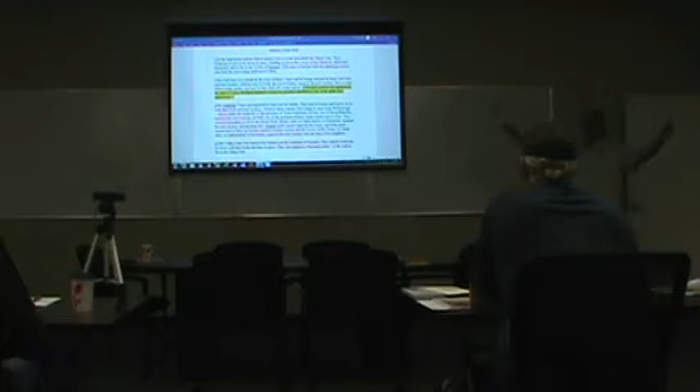So the sheep that were being sacrificed were brought in through the sheep's gate. Fish gate, what came in through the fish gate? Fish. There you go. So I've taken some liberty here because a lot of times these names from antiquity look pretty, we just modernized some of them. So we had Harry over here, Harry and his team. They did the fish gate and the section.

Zach did this, which I think is great. You know, people have always been complaining about managers. I highlighted this, I think it's great. The next section was prepared by the men of Tulsa, but their managers would not put their shoulders to work under their supervisors. I thought that was great. Even back in antiquity, people are bitching about the boss.

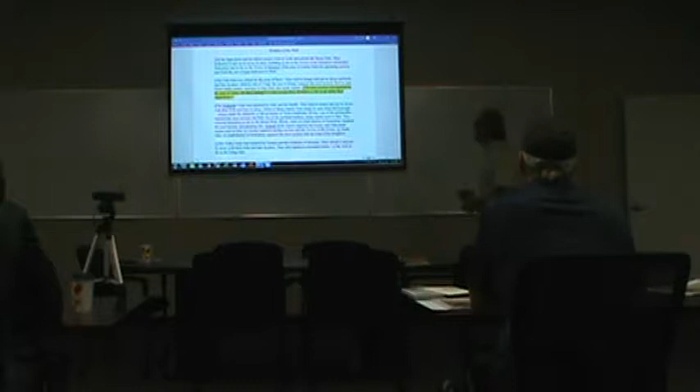So, they went over and they did the next section. Then this Jeshana gate was repaired by Jody, and then some repairs by McDonough, then they had goldsmiths. And so they took the walls around Jerusalem, and each group of people was assigned to a task. The Alma Gate was repaired by Dennis and so forth. The residents of Marietta, did you like that?

Yeah, okay, fine. All right, so what's the point? What did they do to repair the walls? First thing they did is that they had a task that they were trying to do. And what was that task? Build a wall. Right? They were building a wall. They then took a look at their available resources of people and product, and they broke it down into specific sections of work.

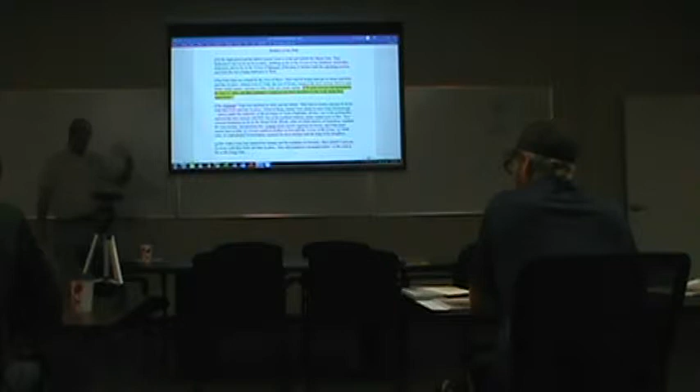Okay, and then what did they do? They went to work. What they did in antiquity, we do every day. The reason I bring this up is simply to say, anytime you go back through history with any ancient structure, you will find that the procedures and techniques they used to plan are exactly the same thing we do today. So when we begin a task, we say we've got to start it, we have a finish. But what comes before the start? Planning comes before that. What comes before planning? An idea.

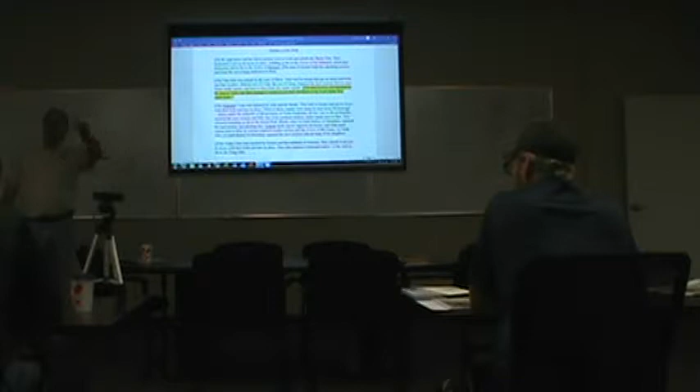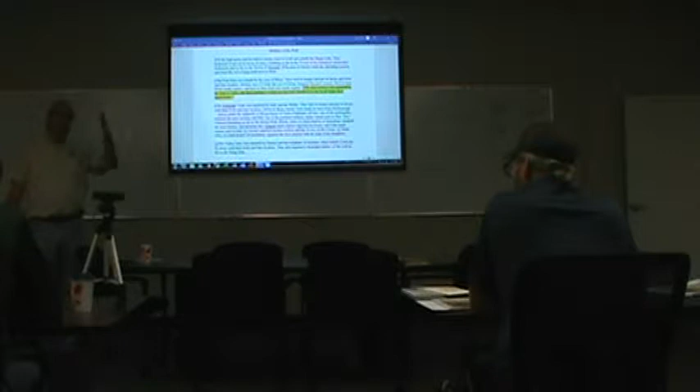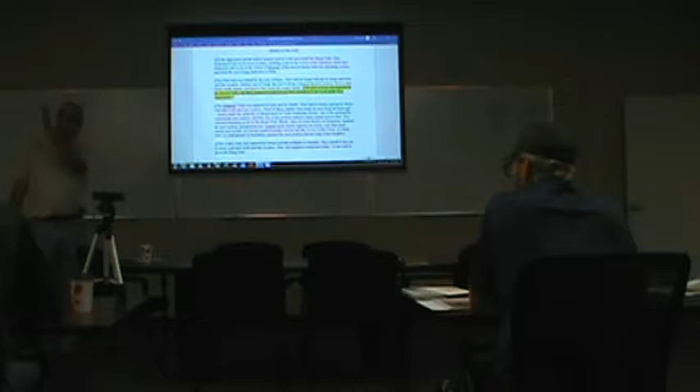The owner has an idea of what he wants in a building. He has the architect put that into plans and specifications, and from those plans and specifications we turn that into reality. So where are we in this line with our scheduling and planning? We are in between the concept, the idea, and the preparation of working drawings. And now we're between the working drawings and the actual physical commencement of work. That's where scheduling occurs, okay? Does that make sense? Okay, all right.

Everybody here has got a book on CPM scheduling, and in this particular book it's broken down into sections. Section 1 is the pre-project planning phase. Now on the back table are plans on Live Oak. If everybody will, one person per table, go get a roll of plans on the building and get them up on the table.

You got props. Here, I've got this, this stuff works better. Great, and I can help you with the computer along. All right, okay, everybody got the blocks? Okay, open up your blocks. Yeah, they just throw them all out. All good, nothing special. Do not throw them at each other.

Okay, find your A, B, C, D, E, F, G and put them in alphabetical order. I don't have a certain block. Here, right here, we got it. There's the name, there's the fee. Tell me when you got them in alphabetical order. I don't care if they're in a line or up and down, however y'all do it. A, B, C, D, E, F, G. Brian, you want to hop up with those two so you can work in a team? How do you want to do it, Brian? It's all good, yeah, if you want to run solo. All right, no, they're all in there. Okay, you got it? You have two rows of M, N, O, P or M, N, O on both sides. They're trick blocks.

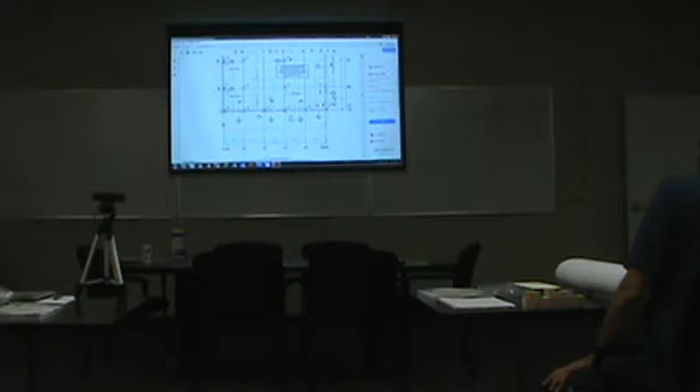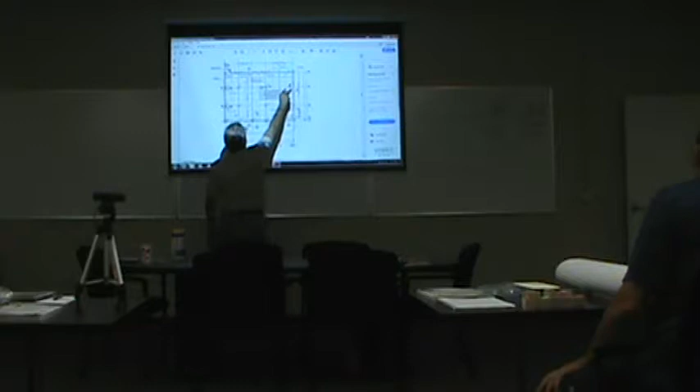Okay, so on our pre-planning slide, this is the goal: pour the footings for the shop. We have a series of shops, we've got continuous footings down the back of the shops, the right side of the shops. We've got a turn-down footing on the front, some isolated footings, and a footing running along column line 8 and 2.05. Everybody clear on that?

Okay, what are footings? Footings are the supports for the building. These are typical spread footings, they're not specially finished, they're not grade beams. So we're going to be bearing them on dirt. And so from a pre-project planning phase, what do we need to know about those footings?

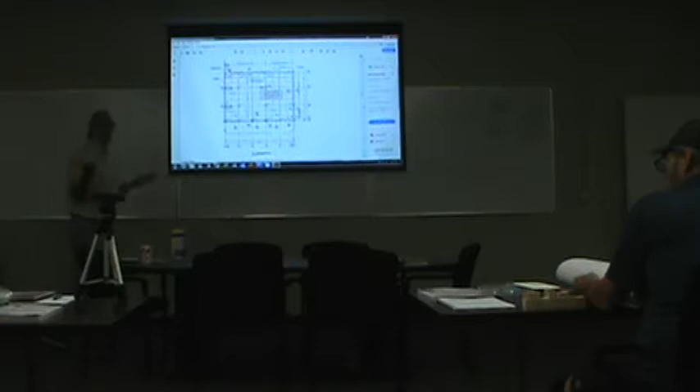Elevator. All right, first things, start here and we'll go around. Go. Okay, you need to know dimensions. Soil? Okay, soil bearing, that's good.

Rebar size? That's good, okay. Let's just say concrete rebar. Concrete strength? Okay, so we got that. How about elevation? Okay, you need to know the elevation.

Lisa? Lisa, you got anything? No, I don't. Okay, that's all right. Jonathan? We're gonna lay them out. Okay, you need - well, we said dimension, that's up top, okay?

David, any ideas? It's okay, we're not trying to put anybody on the spot, just trying to get some idea. Okay, we need to call that material handling. The amount of concrete - yeah, okay, so we need quantity. Okay, we need material handling.

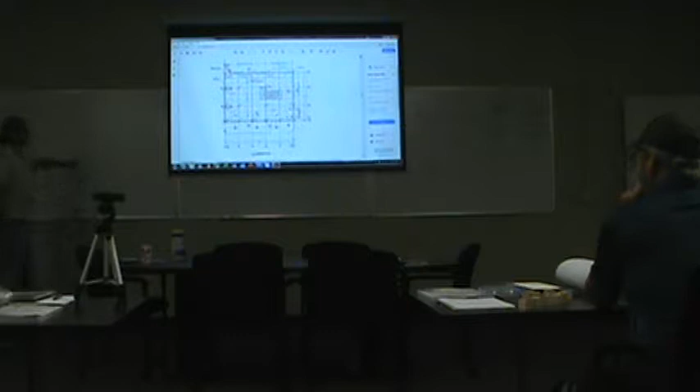Whether it's being poured or pumped - yep, that's under equipment, okay. Okay, how about material procurement?

You know what I mean by that? No. Where you get your concrete from? If you don't have the rebar, you don't know where the concrete's coming from, you don't have your rebar, you don't have your anchor bolts, how can you pour footing? Right? What else are you gonna procure besides the things going in the ground?

Might you need formwork? Okay, Live Oak, Florida, sandy soils, right? Probably not gonna be able to use the side of the dirt down there for a footing - maybe, maybe not, okay? Might need forms, okay. On the equipment side, okay?

Do you have a benchmark? Okay, do you know what you're laying out from? Are batter boards up? Okay, have they been checked?

Okay, so when we go through our activities, the first activity, which we will call A, take your A block and put it first. Okay, just move it up on top, there you go, there you go, now.

So we gotta get material on the job, material procurement, right? We know we gotta have material on the job, okay. Second thing you need to do is that you gotta have dimensions, which we'll call batter boards, BB, and layout. Okay? I know I got material coming, and then I gotta lay out the work, right?

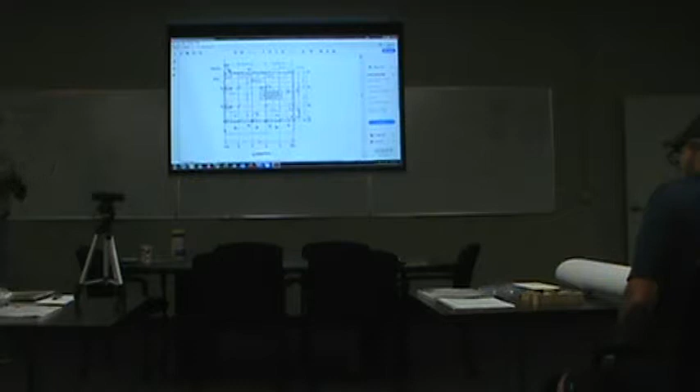What's next? Equipment. Quality control, we said procurement, here's A again. Okay, now, once we know where the building's going, we have a general idea about what the activity is going to be, right? So we've got to get equipment, A, B, C, D, and labor on the job, right?

Okay, and what have we done so far that has actually constructed that building up to this point? No physical work has been done, except batter boards and layout, okay? It's okay, you had to do all of that because if you do all of that correctly, it allows you, when the expensive stuff gets on the job, to

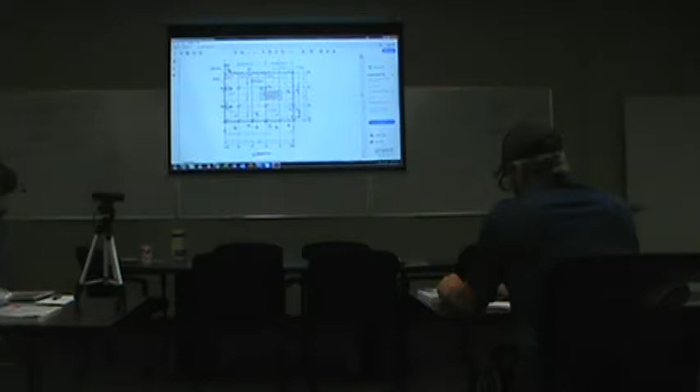If I dig 100 yards of footings, 100 cubic yards of footing dirt, okay, and I have a backhoe that's there for a week that cost me $500, how much per cubic yard did the excavation cost? 500 divided by 100, $5 a yard. If I leave that backhoe out there doing nothing all month, that 100 yards of concrete, or that 100 yards of footing excavation, cost me $2,000, so it would cost $20 a yard.

Okay, so if you think about it like this - anybody ever bought an engagement ring here? I know you haven't, but anybody ever gotten an engagement ring here? Okay, how do they sell diamonds? By the carat, right? Very, very small unit of measure.

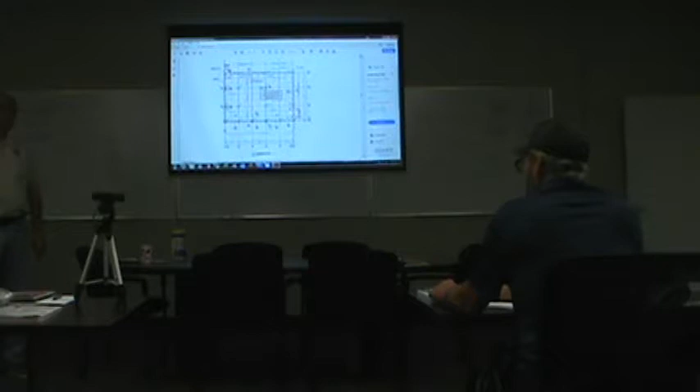Are diamonds cheap? No. No. Okay. How do they sell stone? By the ton. 2,000 pounds versus a fleck.

Okay. General rule of thumb is the more expensive something is, the more you need to pay attention to how much it costs. Okay. Now, you got to have quality control, be sure your footings are dug the right size, correct? Okay, so you then begin the physical activity.

Now, under the equipment side, okay, you also have to have ways to have your elevation right, correct? So you got to have a laser on the job or an optical level, whatever you happen to be using. At that point, you're gonna do what? You get the footing excavated, what happens?

Rebar, right? Okay, then what has to happen? Inspection, and then what? Concrete. Pour that damn thing before it rains, okay? Pour it before it rains.

All right, so what I want you to do, okay, is to take your blocks, okay, and on a piece of paper, I want you to arrange your blocks like this.

You have activities that can all start at the same time. Right? What we just went over, correct? And what would those be? You could start material procurement, right?

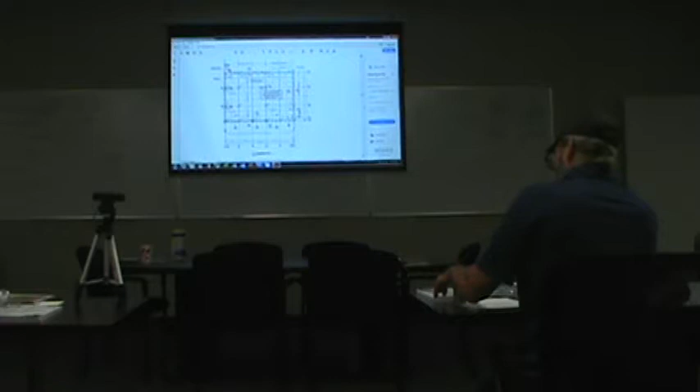Everybody got AB? You're feeding us, where's AB? Come on, man. AB, you got AB? All right, let's put them like this, AB in a line. Okay? Put them up and down. There you go.

Now, what we're doing is we're doing what's called a block diagram. See, wood blocks, I used to be called a blockhead when I was a kid. Okay, so we got our A block and our B block. And as we go from left to right, this is going to be time. Okay? Those two activities start first.

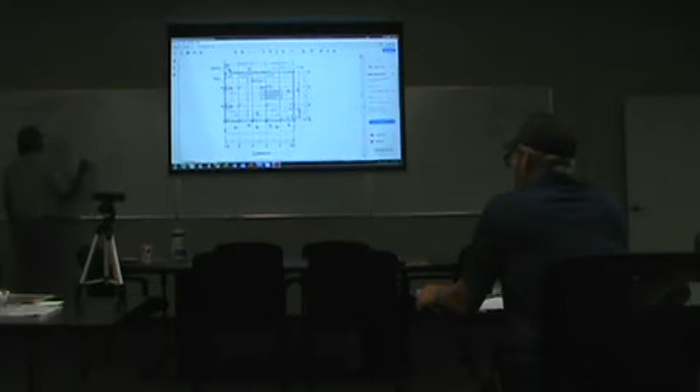Okay, now once we finish our batterboards and layout, what's the next thing we're going to do? We're going to come over here to equipment, okay, and labor. Okay, and what did we say we were going to call those? They were D, what happened to quality control? Quality control is here too, put C down here too.

Okay, and equipment and labor we call D, so put D. There you go, you got 3 in a row and a D. That's perfect, 3 in a row, perfect.

Then we're going to rebar, which we're going to make F. Okay, G is going to be inspection. Put a G, is inspection. And then if you see the E, F, G, H is going to be what? Pour.

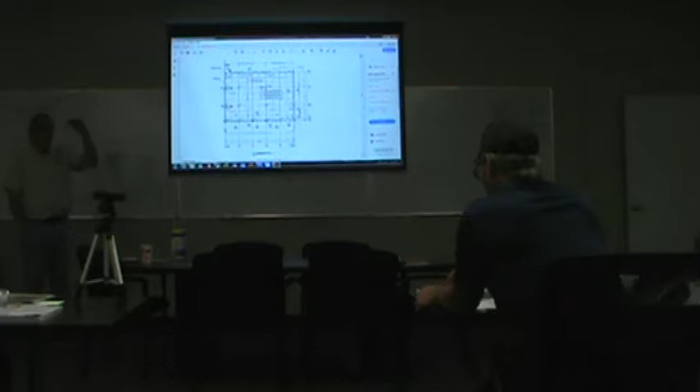Now, there are activities that each person in the team is required to do under each of these things. Okay? Now, who's going to do material procurement? What's a role, what person on the job has a role of material procurement?

Daytime super, right? Yeah, daytime super, could be project manager, helps to do the front end work. Okay, we go back a little further. Project manager's got to have an approved mix design, right? He's got to have approved rebar drawings, he's got to have approved anchor bolt drawings. Okay, so before you can, you've got to have some things feed into here from the PM side.

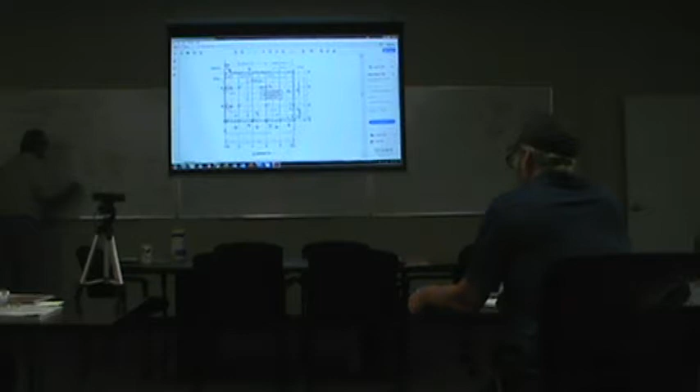But since we're dealing only with the field, we're assuming all that is done, and so we're gonna have a supervisor here, okay? The B, which is your dimension and so forth, is gonna be the supervisor plus concrete foreman. Right? Maybe a laborer will be involved, right? C, quality control, that's supervisor.

So as you look at each of these activities, we then come over to equipment labor. Who's getting the equipment labor? That's gonna be over here under your concrete foreman. Okay, assuming we're using a concrete sub, okay? Digging the footings, gonna be the concrete foreman plus labor. Same thing on rebar. Inspection is gonna be independent.

Okay, another thing we add here is quality control. Who's doing testing? Have they been lined up?

Okay, and then we have the actual physical pour. So let's put some time on this, and let's walk down the critical path.

Okay, does everybody know what a critical path is? Okay, all right, quick definition on critical path.

The critical path through a job is the longest path from start to finish. When I sum up my activities, the critical path is the longest line of time, once I add durations. Now, any activity delayed long enough will become the critical path.

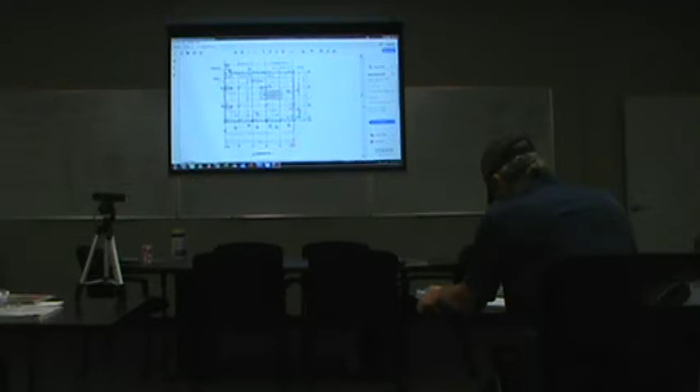So let's put 2 days here. Okay, so your activities A, B, and C have 2 days. Getting equipment on the job, being sure it works - how much time? Just say a day for this example.

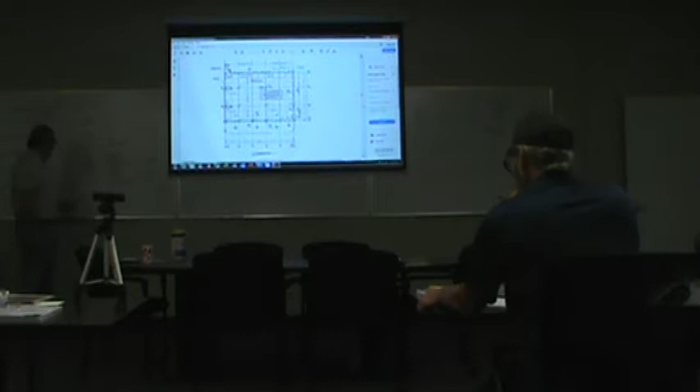Okay, so how much time are we at walking down the critical path? What are we up to? 3 days. Okay, all right, batterboards are up. You know, we had this back under quality assurance. Think we can do the batterboards in the first 3 days? Probably, okay, let's just say that for our simple example.

Let's not necessarily judge the accuracy of the schedule, but do the schedule. Okay, we're then going to dig the footings. So how long is it going to take to dig all these footings? Yeah, let's put 2 days down. So you got 2 days to dig.

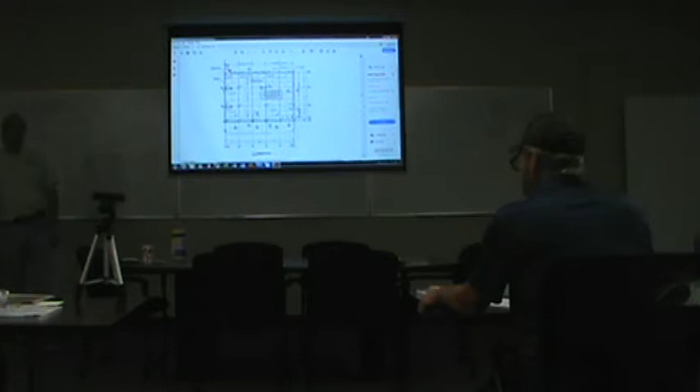Okay, you got anchor bolts and rebar, and you got to check those, and let's just say that takes 2 days. And you've already made friends with the inspector, and he won't delay you at all, he won't stonewall you. You call him and he comes out in the next 15 minutes because he likes you so much. So in 1 day you get your inspection, and the next day you pour, and then you strip and clean up.

It's a day, so let's count that up. We had 2 days that went to 3, which went to 5, which went to 7, which went to 8, 9, went to 10. Does that make sense to everybody? So if you look at your blocks across your paper, that's a 10-day duration.

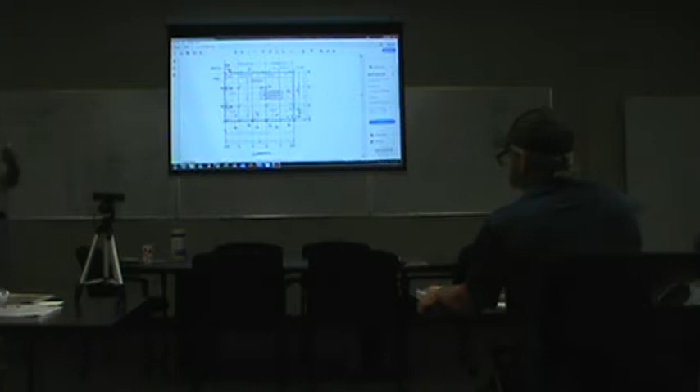Now, I'm not trying to give you guys productivity models here, but I'm trying to get you to think about how one activity affects the other. Okay, how does one activity affect the other? So...

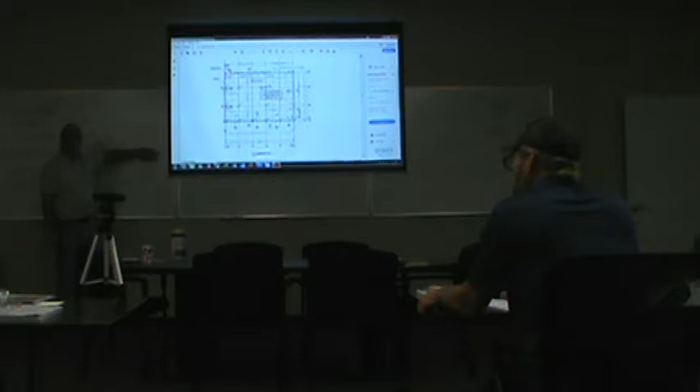Anchor bolts don't show up. Okay, so what can you not pour if you don't have anchor bolts? Can't pour that, can't pour that, can't pour that, can't pour that, can't pour this.

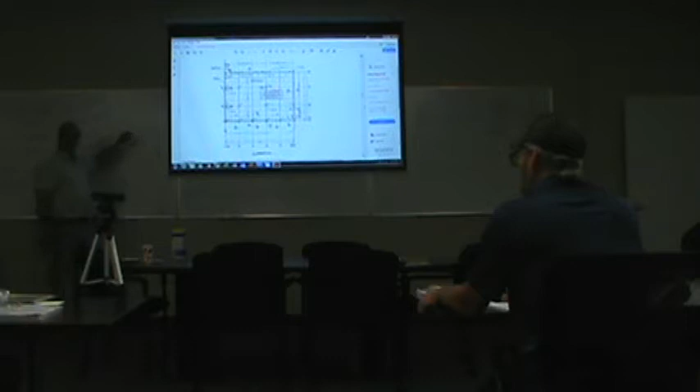Okay, now if I've got 20 days worth of footing work to do, I may be able to stagger the anchor bolts. You know, I may be able to do just continuous footings without the anchor bolts here. But for this simple example, we're assuming everything is there. But what I'm trying to get you to think of, if you don't have everything here, you can't do all the work. So you have to be thinking ahead to the 6 Ps on everything that you do.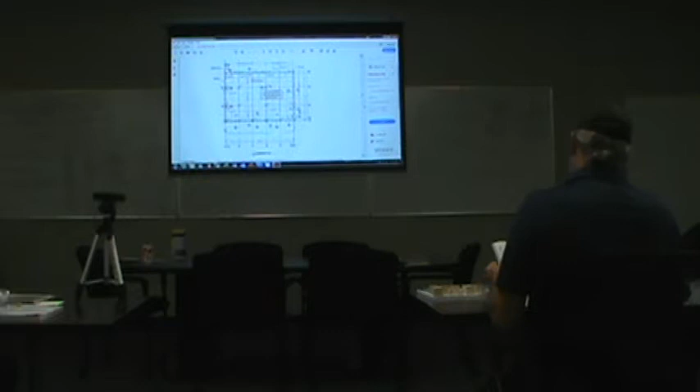Okay, so we kind of put some days down, but let's have a little bit more fun with this. So Darcy, if you would, let me see if I can see this. Go to sheet 4.2S2. You can move blocks.

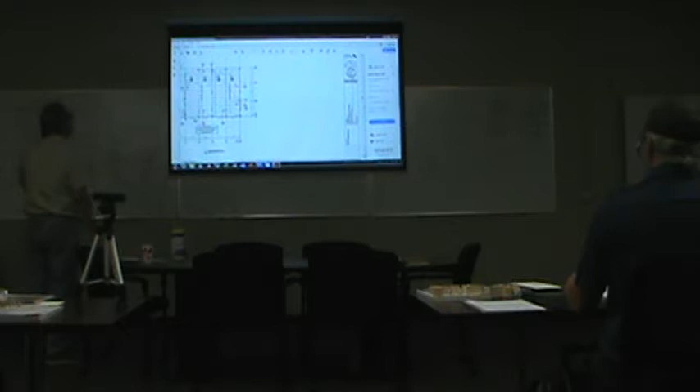Darcy, come back. Four. Sorry, only two. Two, whoa, stop. One more, 2.2, one more down. One more sheet down, I'm sorry. 2.1. Yeah, 2.2.

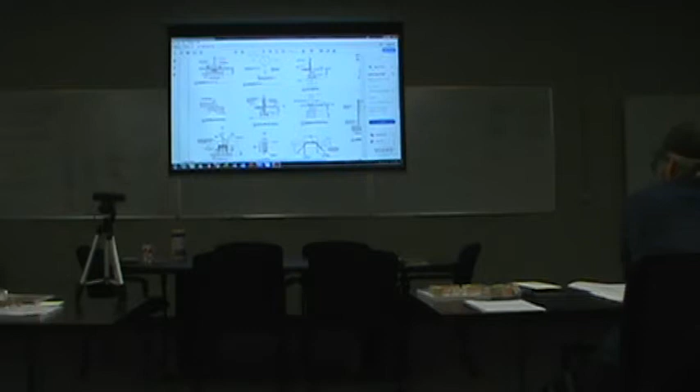Okay, that's on the sheet. Did I say 4.1? I'm sorry, did I say 4.1? Go to 4.1. Yeah, you're on the right page.

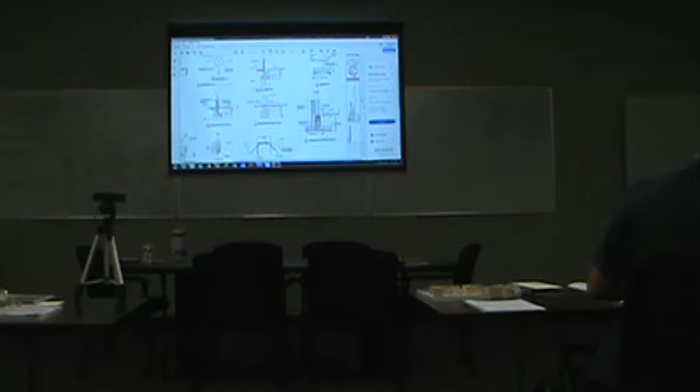Good, okay, let's look, just for the sake of conversation, at detail 2. Excuse me, detail 6, detail 6. Yeah, good, thank you.

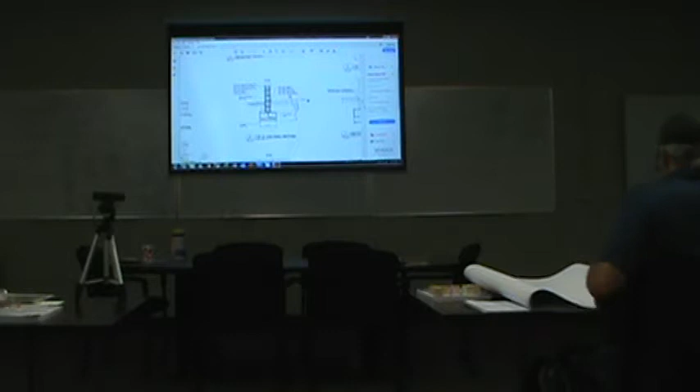Okay, now we know from looking at our foundation plan that we have a length and dimension on our footings, right? Okay, so we know this building is 100 feet wide by 70 foot deep, right? Everybody good on that? Okay.

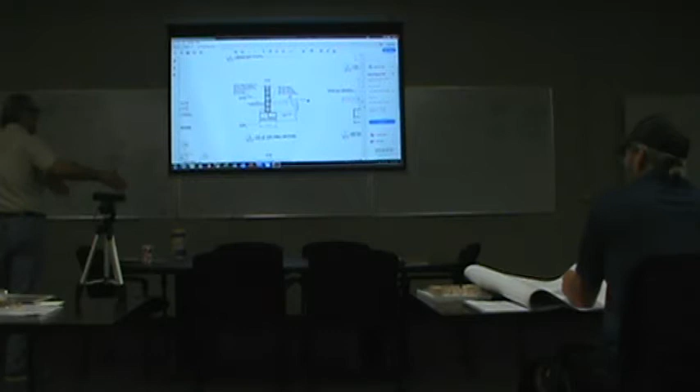So using our lessons in geometry, if we've got 2 footings 100 foot long and 2 footings 70 feet long, that's how many feet of footings? 340, rough numbers, okay?

Now, we would do an accurate takeoff on that. We know that footing by dimension is 2 by 1, so that's 2 cubic feet per running foot, right? So if we're 340 feet long and we're using 2 cubic feet per foot, how many cubic feet of concrete do we need? 2 times 340?

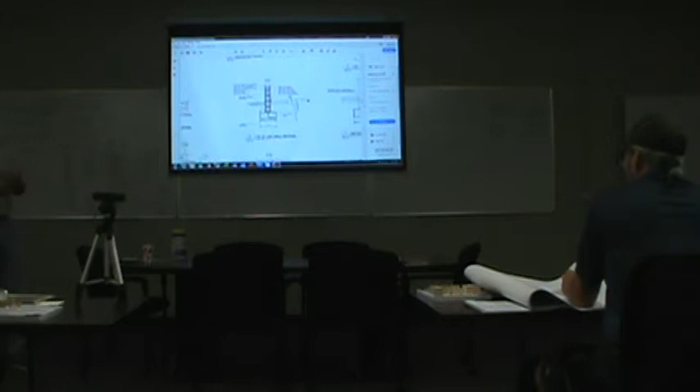680, right? Somebody divide 680 by 27. How many cubic feet are in a yard? 27, 3 foot by 3 foot by 3 foot. A yard is 3 foot long. Yeah, there you go, you've been practicing. What is it? Someone got a calculator here.

25 what? 0.18, 25.18. I don't think they'll let us order a .18 yard. So we're probably looking at 26 to 30 yards of concrete, somewhere in that neighborhood. We're slinging numbers right now, guys, please don't sling them like that when you're buying the stuff. Don't let me make a $120 mistake by going too fast.

Okay, so you got 25 yards of concrete. Now, the old rule of thumb is that you ought to be able to place 9 yards of footing concrete an hour. That's an old standard productivity rate, right? So if I've got 25 yards and I'm getting 9 yards an hour, may go faster, may go slower, we'll just use it to do productivity rates. How many hours is it going to take me to pour those footings? Three. Yeah, three. So you can then break each one of these items down into individual productivity rates.

Okay, tying rebar, you get an idea. How much rebar can you tie in an hour? Now, as supervisors and as people watching others work, your job is to start watching and equating what you're actually seeing done to the person.

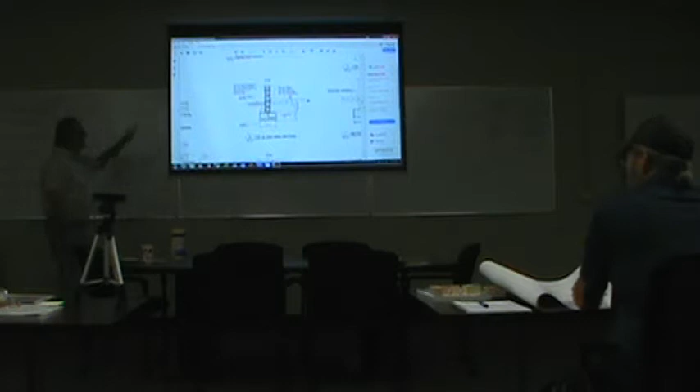How many pieces of sheetrock should 2 hangers hang in a day? There are productivity rates on that. Work up high takes longer than work right off the ground. All of that goes back to productivity rates, and your schedules are going to help you do that. Now, using your blocks, what other activities could be going on this job while we're doing footing excavation?

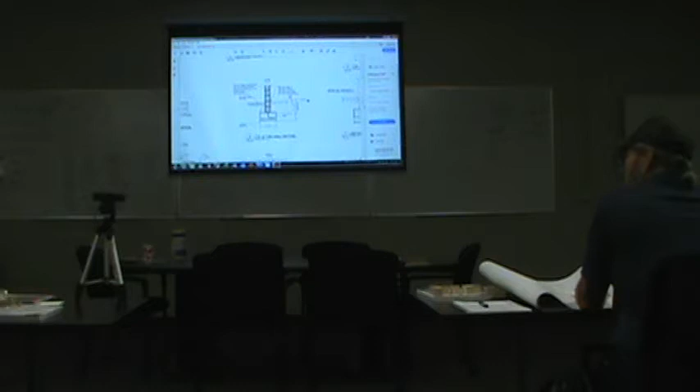Be doing site work, right? We could be putting in storm drainage, running sanitary lines, running water lines, curb and gutter, depending on where we are.

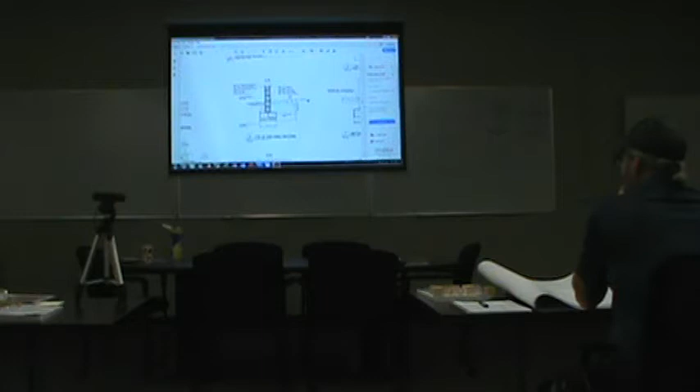We're getting ready to start laying masonry walls. Can you run it simultaneously? Can you not run block masons and steel erectors simultaneously? It depends on the design of the building.

If you have a roof structure that is self-supporting and you have block infill - your 4810 Publix and some of the others are freestanding steel structures - yeah, you can do that. But for this example, this particular building, let's go to sheet...

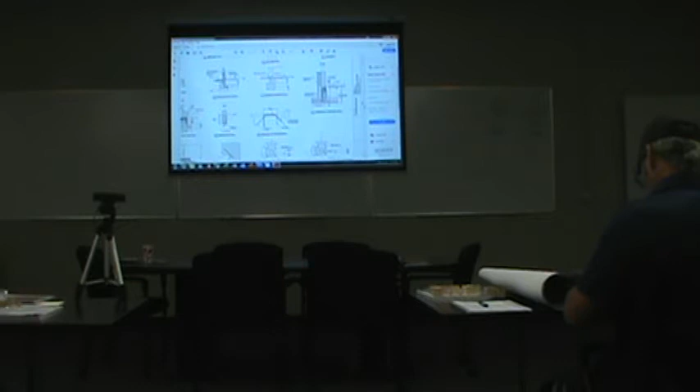Let's go to sheet 2, 2S3.1. There you go, Marcy, right on.

What do we see? Yep, roof framing plan. Now let's start with our roof framing plan, because what we're trying to do is support the roof, try to get a roof on the building, take weather out of the equation. Once you get a roof on the building, you work inside when it's raining - that's kind of a typical goal.

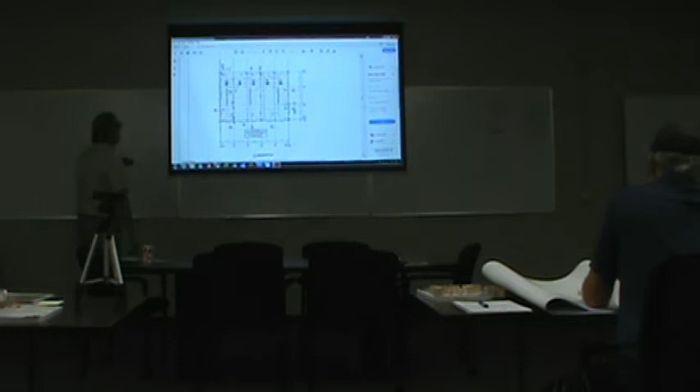Okay, when we take a look at column line 8, 2.05, look at section 10, 2S4.4. Let's go to sheet S4.4. Okay, section 10. Yep, got 10, good.

You got section 4.4, section 10. Okay, you got 10. 10 over here. Okay, we got 10, great, good job.

So what is supporting that column line? Just stay on that framing line. All right, we'll walk over to the other.

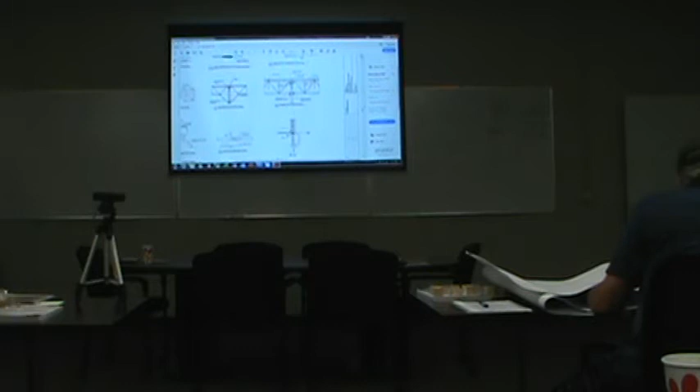Okay, do we need that block wall up to put up the steel? No. Why? Because you've got a row of columns along that line, and then you have a steel angle. That concrete block wall you see there is actually the wall of the Publix on this job.

So we do not need a block wall there. Okay, let's flip back to our roof framing plan again, and let's look at section 8, 4.4, 2S4.4, and 1. Go to those two and see what they look like.

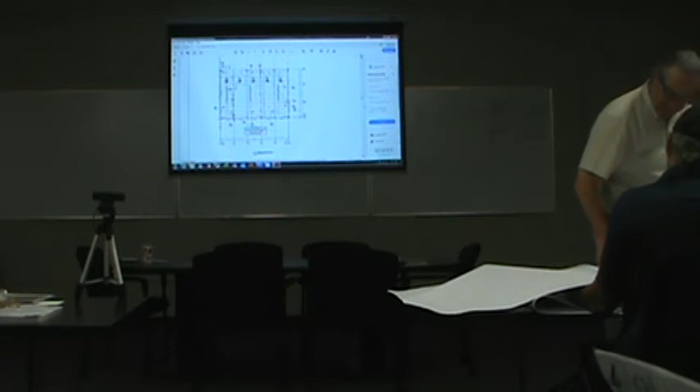So we need to have that block wall up to support that deck, don't we? Yeah, you need that for section 8, 4.4, 1, 4.4. Once again, it's showing how to put the truss girder in.

And that's a truss girder, it's on joist pockets, truss girder. Let's go. See that truss girder? That 28G - there's a truss girder here, a truss girder here - so they're showing a different seat configuration, right? You see that?

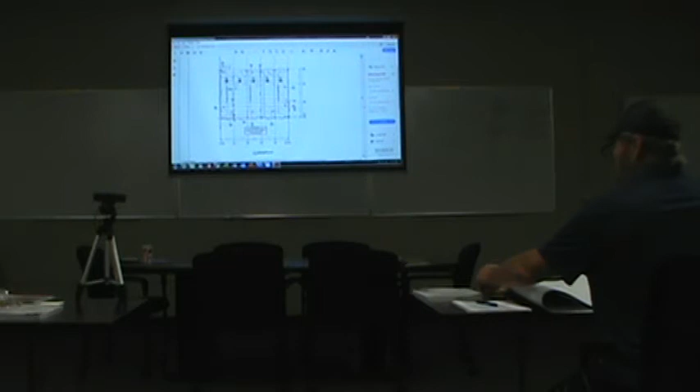Okay, so 4.3 is right here. This is a truss girder coming in. You can see they've got a different seat detail on this as opposed to - well, there's some notes on 4.3, and some of it's on 4.3 and some on 4.4.

Okay, so this is the platforms and that's on the wall. You see that? This is the block wall of the shop. This is the roof deck. This is showing here, the truss girder.

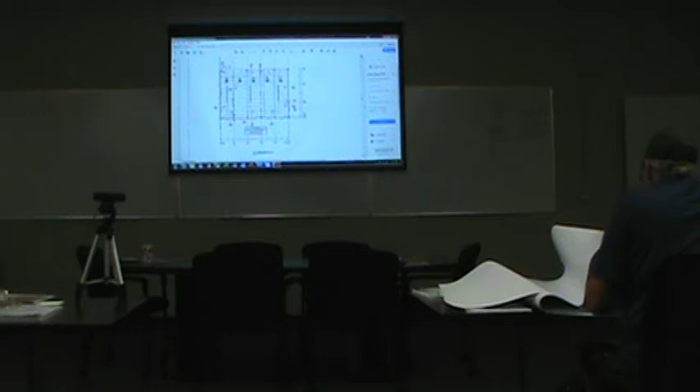That's a designation for a truss girder. That's the truss girder designation. This is your joist designation.

So you see how your truss girder is sitting in on the wall? Here, on the previous page.

So you need to do the deck bearing - the wall's got to go up to bear the deck. Going back one - with the truss girder, you've got a deeper seat where your truss girder comes in.

See right here? This is a truss girder. Does that make sense? So you've got metal deck running perpendicular to the joist, it rests on the wall, the truss girder also rests on the wall. Okay?

No, you have to get the wall up first, and then you're actually going to have a drop in the back wall for that to sit on. Yeah, you see the truss girder do that.

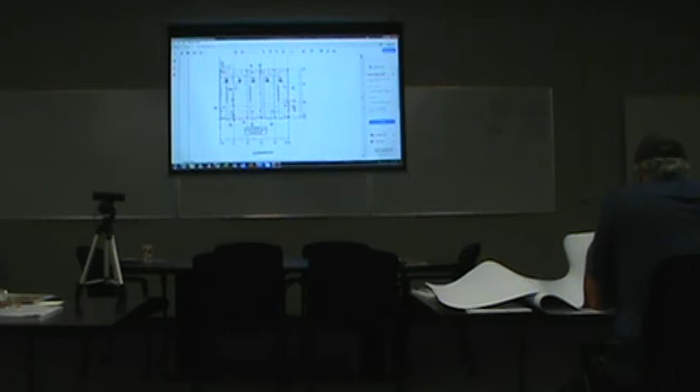So we're all good on seeing that at the rear of the building here, we've got to have that masonry wall up to support the metal deck, but we also have to have that wall up to support the truss girder.

Now, I don't know where everybody's at, I don't want to be too basic, but your designation here on the bar joist, it says 24, KCS3, a 24 KCS3. Does everybody see that? Yes. Okay.

Now we run perpendicular. What do you see here? Let's read that. 24G, 4N, 7.0. Okay, now that is what's called a truss girder. Your truss girders are GN series and things of that nature.

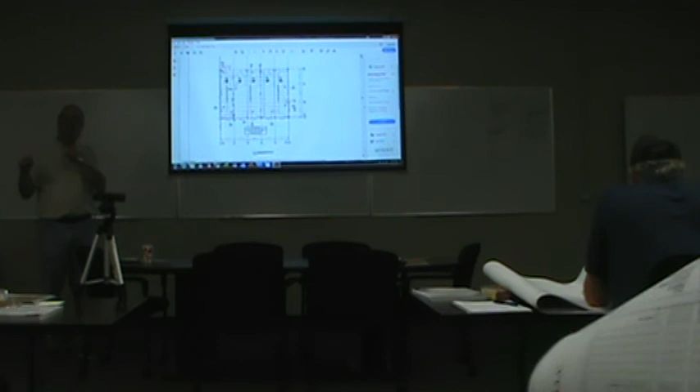You'll have a kip load on it, like 6.2, 1.3, things of that nature. So the way that they framed this thing is that they ran truss girders front to back along these lines, and they ran bar joists this way.

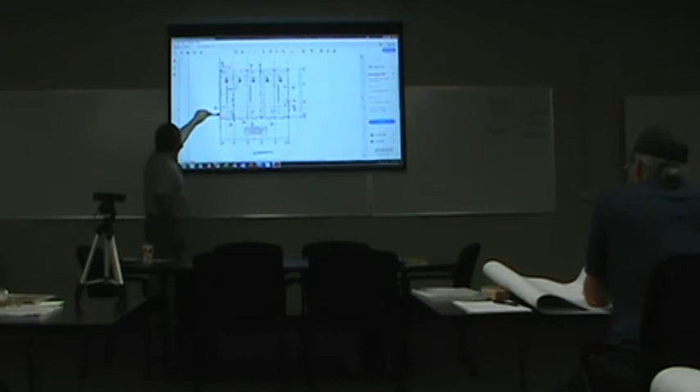What's this denotation? W16 by 26. Everybody understand what that means? Okay, you got an I-beam. The W means that it's a wide flange section. The top and bottom of a beam are called the flanges. This is called the web.

So a W16 by 26. The approximate, and I do say approximate, height of a W16 by 26 beam is 16 inches. It's actually usually a little bit different than that, would have to look at my steel book. It might be 15 3/4 inches, might be 15 7/8, might be 15 1/2, it may be actually 16 inches. But the first piece of this is the depth of the beam. What is that?

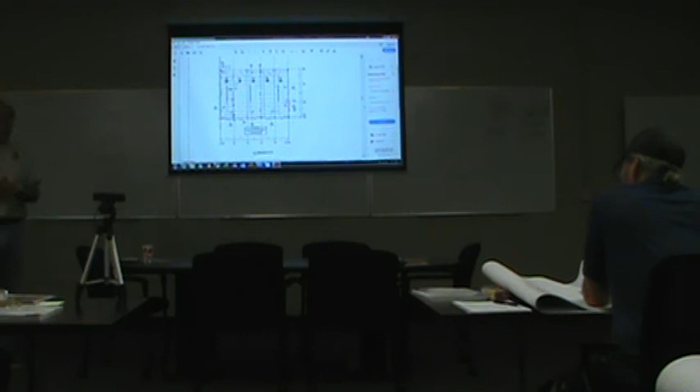Weight, pounds per foot. So if you've got a 70-foot distance times 26, how many pounds of beams do you have? Figure it, you got 70 feet of beams, they weigh 26 pounds a running foot. Somebody get a calculator, tell me. 1,820, almost 2 tons of beam, almost a ton of beams there.

Okay, see how that hooks back into your equipment? What do you have to lift? So we know from looking at the plans here, we won't go through the front details, but we've got an idea how the steel frame is going to fit on top of the masonry, right? We see that the perimeter walls on this building, at least the rear wall and the right side wall, are load bearing.

Okay, now what do we have to lay those walls? Got to have the block, you got to have mortar, you got to have sand, you got to have wall reinforcement, you got to have concrete reinforced rebar, right? Yeah, scaffolding. Anybody going in and out of the back of those shops? Door frame. Okay, can't lay without a door frame. So on the procurement side, we got doors, door frames.

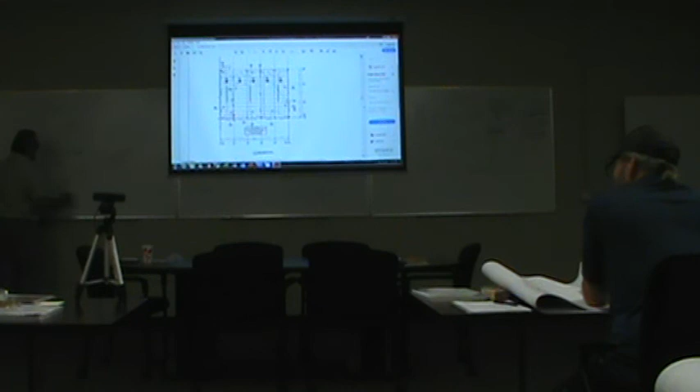Okay, we got block, Dur-O-Wal, sand and mortar. You might even need water, right?

Okay, block, water, okay, you're gonna have embeds, right? When you look at those details there, that truss girder, when you look on that sheet 4.3, what does that truss girder tie to? Ken, look at it clean. That's an embed, see that thing right there? See that? What does that say? Read that to yourself.

What builds into the wall? You see that? Let's get that for you. See that truss girder? Typical girder, see what it sits on?